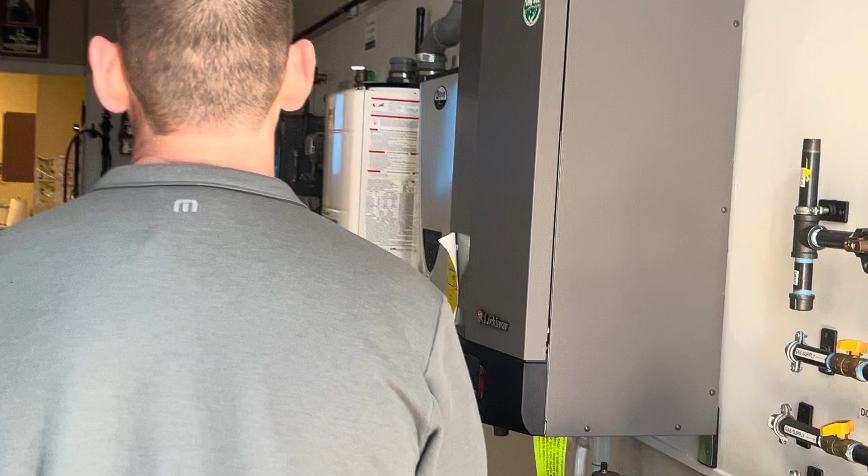We're at the Master Plumbers Council. They're a good little company, mostly dealing with master plumbers in the city of New York. I think you actually have to be a master plumber to be a member. They do a ton of different classes and host our classes too. As you can see, they've got water heaters, different gas lines, gas regulators. They do a lot of gas stuff, and also plumbing training and stuff like that.

Today we're going to go over our new PowerPoints. They're not actually part of the curriculum yet, but we're putting them together now. We'll probably submit them in 2025. It's currently December 2024.

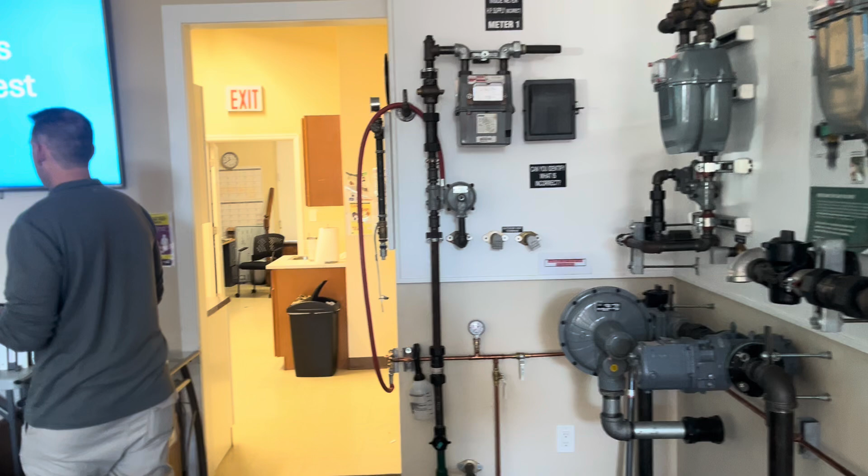He's got a lot of different training on how to start a backflow business, stuff like that. But anyway, they've got a pretty nice classroom, and we're just going to go over these PowerPoints.

A lot of people were saying, oh, you've got a lot of good stuff, but it's all practical - like, are you taking a test? But we want to get some informational stuff as well. There should be a link in the description with the website, and also some timestamps if you wanted to start a little later in or review different things.

The first one we're going to go over is check valves and how to test them - what a check valve is, how they work, and the different ways to test them.

Check valves were patented in 1907 in their first version. There's a lot of different types. Over the years, they've come up with different systems that work - you have swing, wafer, lift, ball, inline, and others. The general premise of a check valve is that they only allow flow in one direction. So essentially, water will flow through the check valve, but it won't flow back in the other direction.

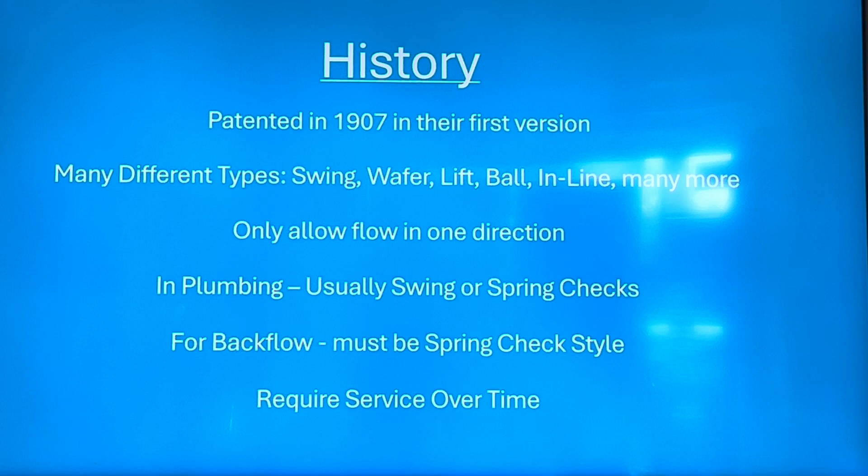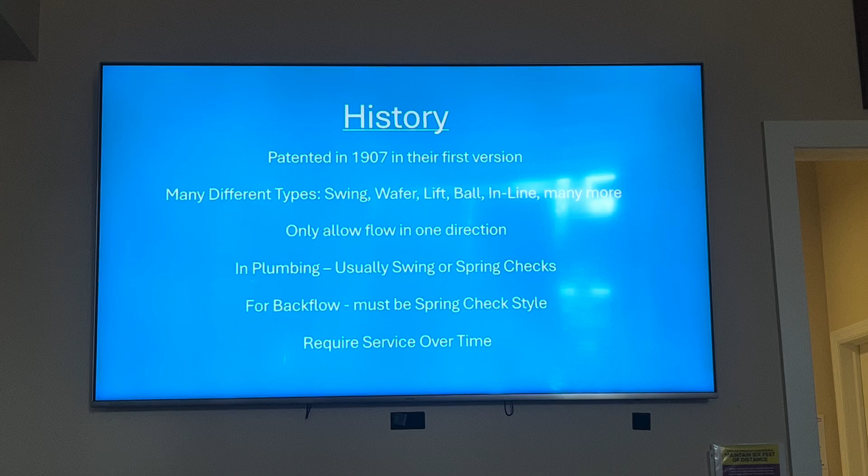Generally in plumbing, they're usually either swing or spring checks in piping. Ball checks are more for plumbing fixtures and a lot of different applications. For backflow prevention specifically, they're pretty much always the spring inline style. They don't last forever and require service over time - different components fall apart, springs break, discs get out of alignment, they get corroded, or you have calcification that causes problems. So the general premise is they're good, they should only allow flow in one direction, but they may malfunction, so they typically have to either be serviced or tested over time.

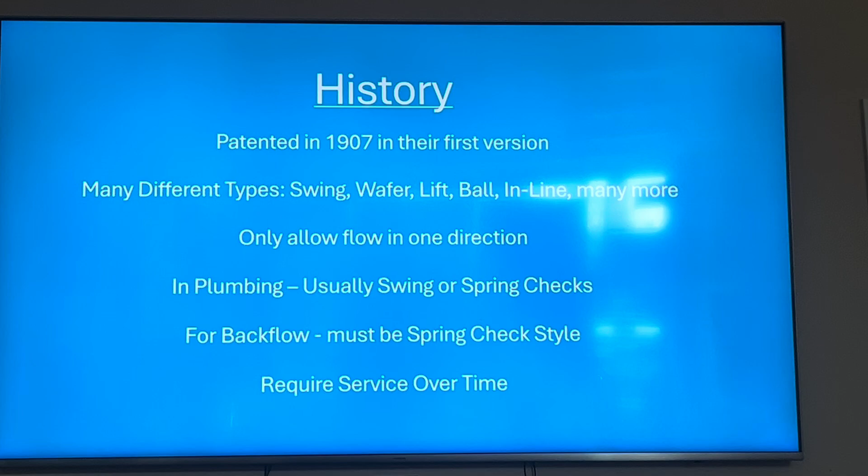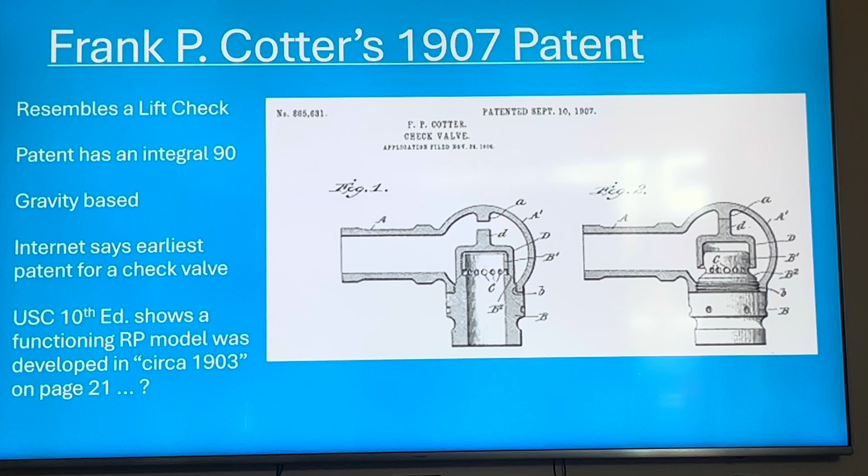The first one from 1907 - the guy, Frank P. Cotter, is forever immortalized in backflow texts and things like that. It just kind of looks like a lift check. It has an integral 90 in the patent, and it's gravity based, so there's no spring - the water pushes the check up and then gravity brings it back down. The USC 10th edition shows there was an RP circa 1903, but I don't think that's correct. I don't know who wrote the USC book - we might have to send in something to them.

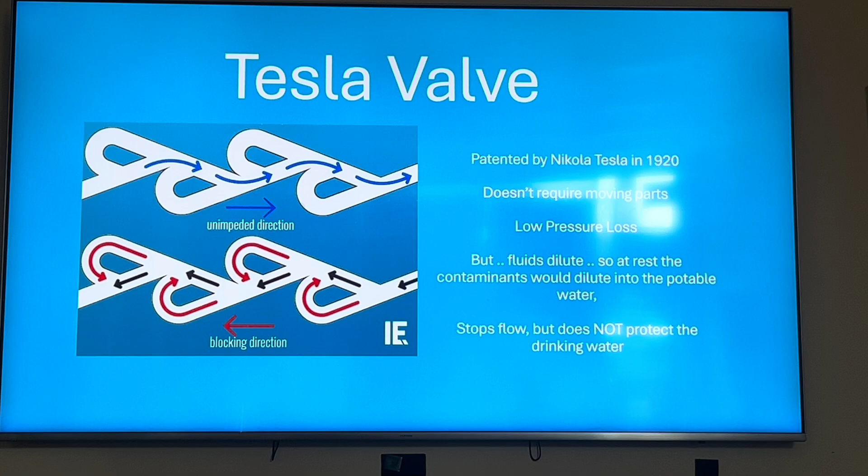There was also a valve called the Tesla valve. It's not really like a check valve in its modern form, but the idea is you just put a bunch of piping in there, and the water goes in the wrong direction, which stops the water from flowing. It's not super practical though, because if there's no flow - say one side had glycol - it would actually just dilute through the check valve, or if you have very low flow. So it's not super practical. I don't think anyone really did anything with it. I think Tesla went on later and invented a bunch of electricity stuff, but it was pretty cool. It's also a possible way you could stop flow in a piping system without a check valve, but because the fluid dilutes, you can't really use it, since the glycol would just fly back through the check valve.

Modern types include the swing, lift, and ball check. Ball checks are mostly in plumbing fixtures. The swing and lift checks are pretty common in plumbing systems. The lift is specifically more common in hydronic systems or process piping. The inline check, usually spring loaded or with some type of spring involved, is generally what you're going to see in backflow preventers.

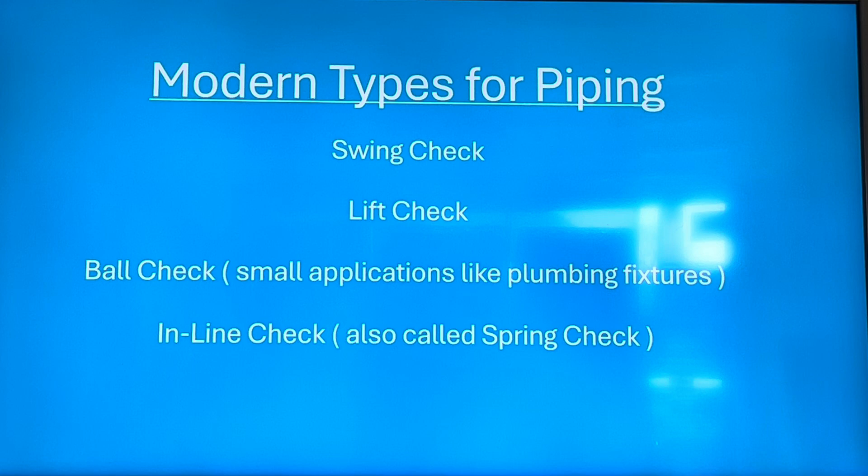You have lift checks. Again, they're more common in processing piping. Flow lifts the check, and then backwards flow doesn't, like the check drops. Generally requires gravity, so you have to have it in the right orientation. With flow, the pressure drop is a lot higher than for a spring check, because you kind of need like a 90 up and 90 back down. So you end up with a little more pressure drop.

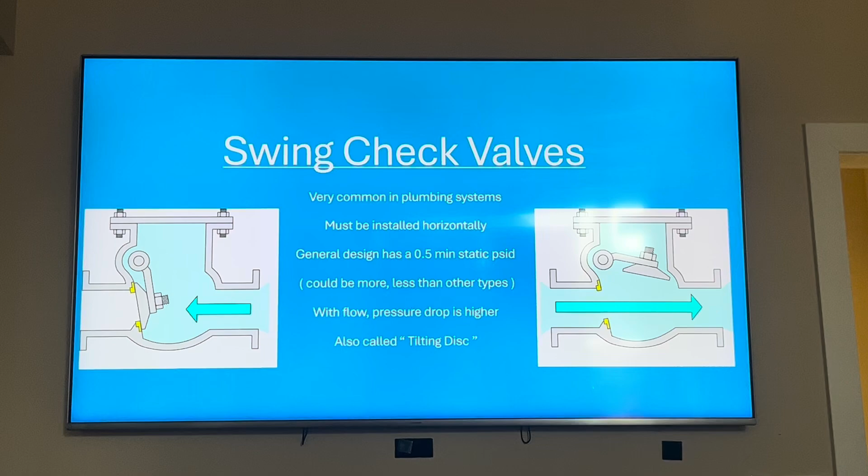Swing checks are really common in plumbing systems. They're not super common in backflows, because you have to put a spring in there somewhere or some kind of internal loading for it to be valid. So you don't really see a whole lot of swing checks.

You also see them in drainage piping, like backwater valves and things like that. They're also called tilting disc - I think the USC book calls them tilting disc style check valves. But most people would call them a swing check.

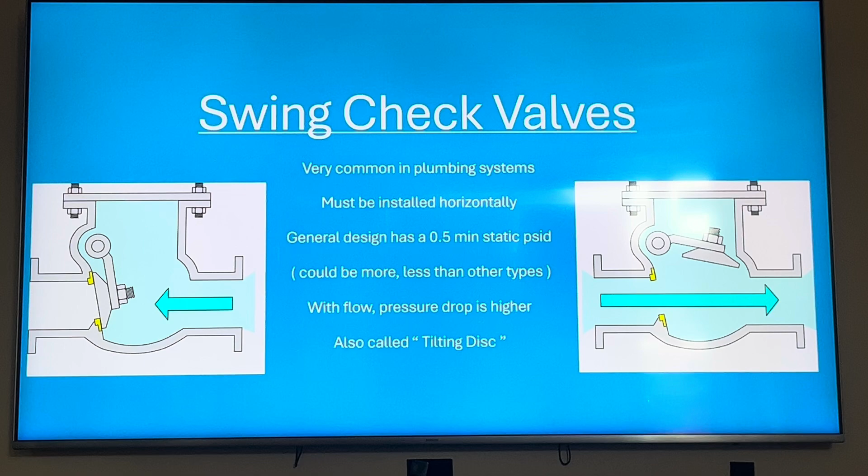Or a swing check. Swing check valves, say you got 60 PSI and then a half PSI drop. Somebody opens up a faucet, it introduces flow, the swing check opens. If you stop flow or you have back pressure, you end up where it closes.

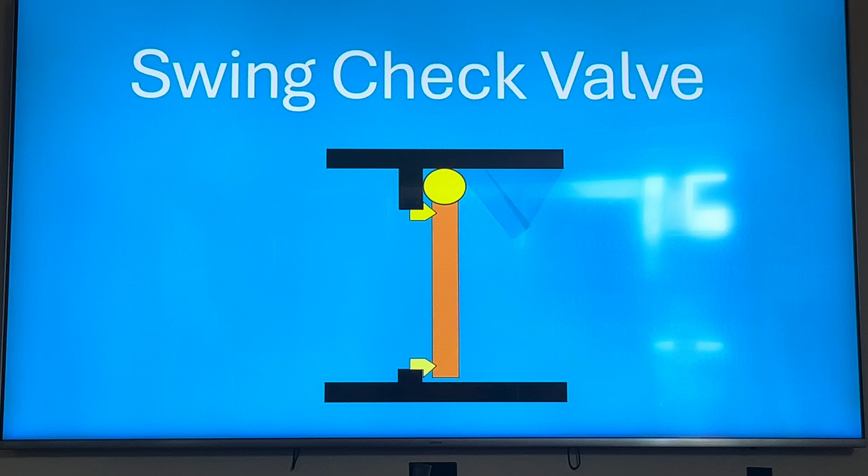Again, some manufacturers - I know Ames uses them a little more than other people - use a swing check, but it includes what they call a hinged spring to create the differential pressure required.

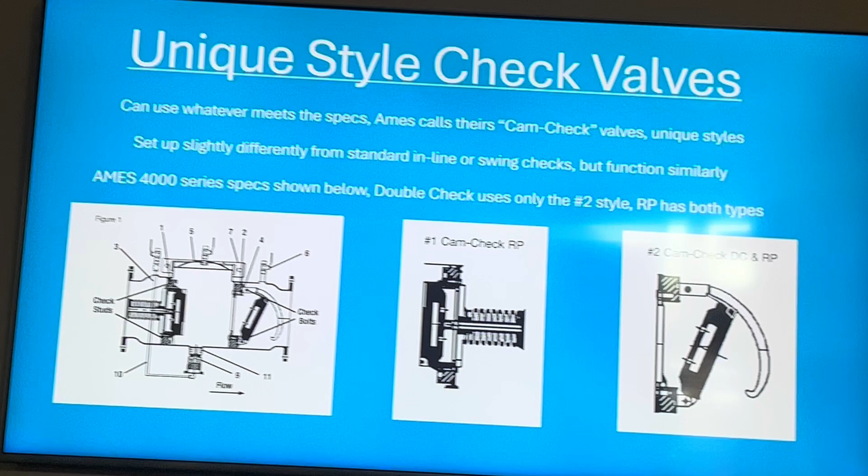There's also a couple of really different ones. These are from the Ames 4000 series. They have what they call a cam check, where essentially you have this thing here - they call it a cam. Then the check valve opens, and if it closes, it pushes it back up. And then this is just a standard spring check.

Also, if you ever mess with the Deringer series - I'm a big fan of Deringers. You see them a lot in LA, but I don't really see them everywhere else. You do see them more there because they're all sticking out of the ground. Essentially it's got an oblique disc, and these are really good for differential pressure drop during like a fire or something like that.

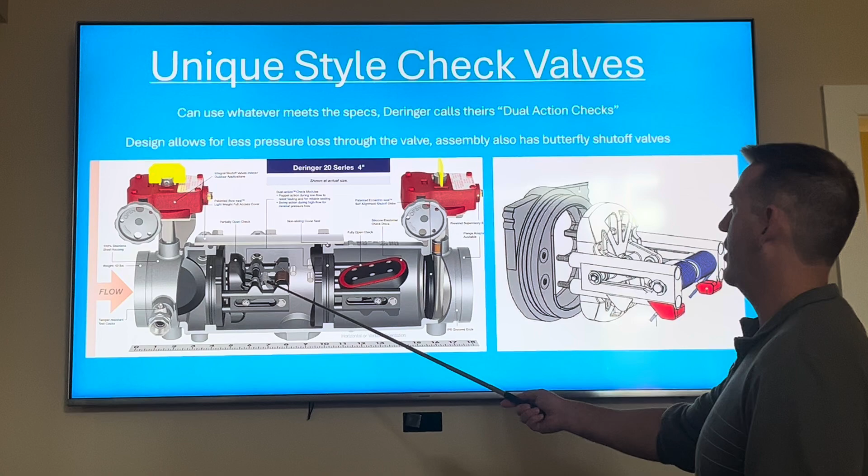Essentially, the check will actually get out of the way. So if you have extreme flow going through, the check will just kind of get out of the way of the flow, and it allows the water to flow more easily and with less pressure drop.

Also, they have the integral butterfly valves that are indicating. They're very good for fire systems as far as cost effectiveness and servicing them. So I'm a big fan of the Deringer ones, but they're kind of a unique style of check valve.

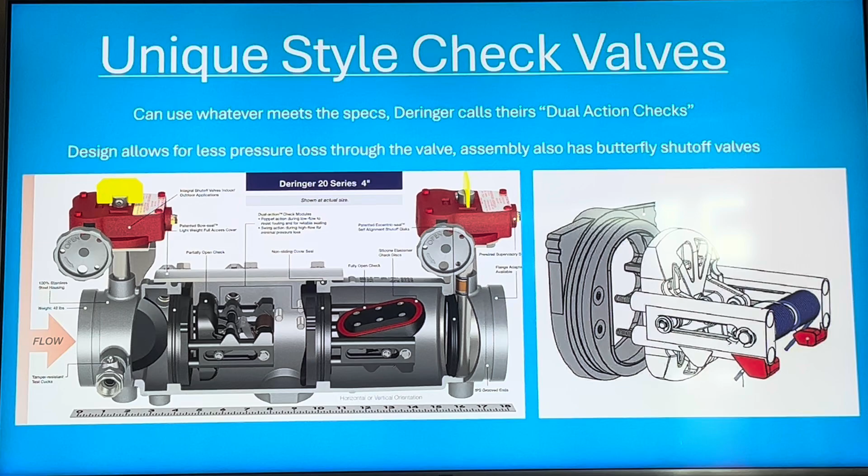So that's the general premise in backflow preventers - I believe it's worded that they have to be internally loaded. So they have to have a loading, and it all has to be internal, but it doesn't necessarily have to be like a standard spring and disc, which is more what you'd see in just standard backflow preventers.

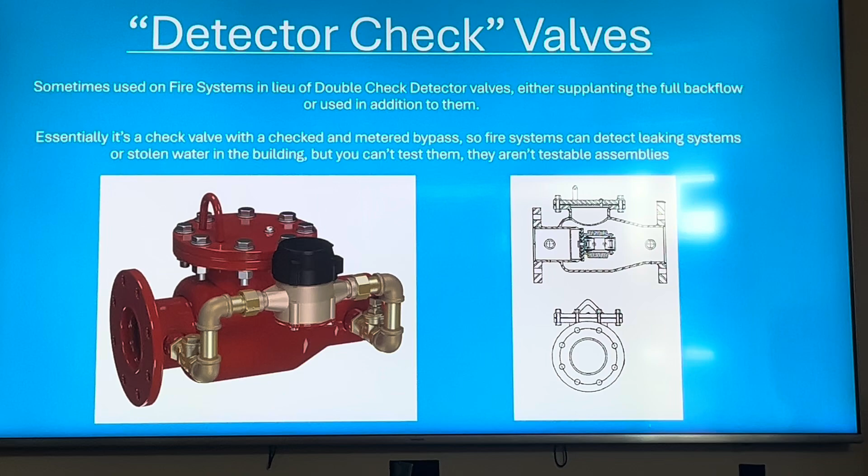But essentially it's just a check, and then it has a little meter on it, and another check. So you have a small check here, and a big check here, and then a meter. So instead of having a double check detector check, they'll put just a detector check, they call it. And then I guess you should be testing them, but I don't see any test ports, so I don't know if they're testing them as often because they can't test them.

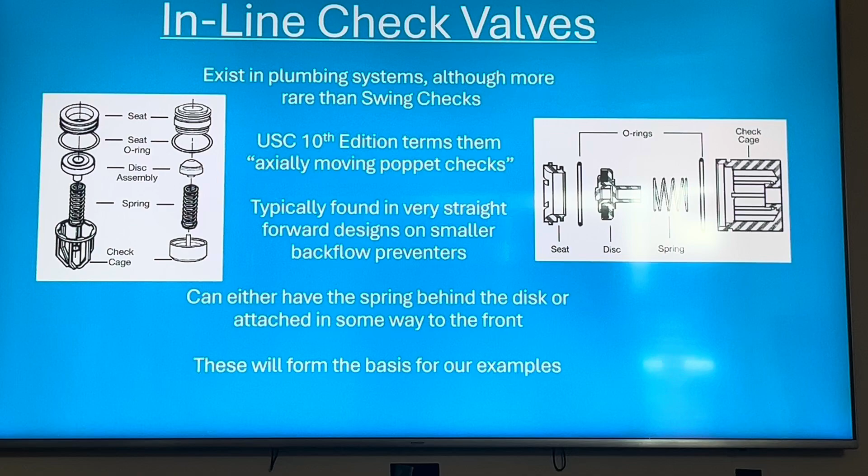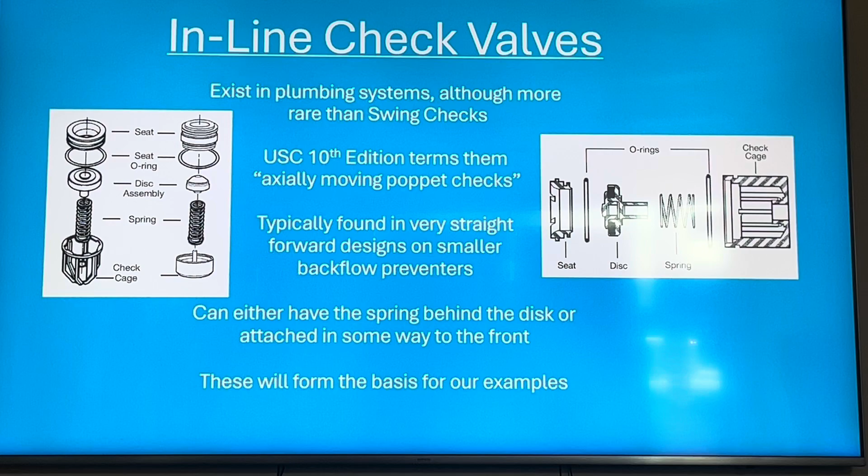Inline checks - you see them a lot in plumbing systems anyway, but you see them a lot more in backflows. Smaller diameter ones are pretty much always going to have these inline check valves. You can either have a spring behind the disc or attached to the front of it. These will form the basis of the examples - we have a lot of diagrams and stuff, and they're basically going to be based on this. So you have a spring check, you have a spring - there's a few different components.

You have a spring, disc, seat, and then just the housing.

So say you have 60 and 59, you have a 1 PSI pressure drop. Somebody opens a faucet, the flow goes through it. Now all of a sudden the pressure drops a little higher, you notice now it's like 4. If you have flow through a check valve, the differential pressure across the check valve will increase. Then if you have back pressure, it just pushes the disc a little harder into the seat and it should seal. So whatever's on the more than 60 side won't get into the 60 side.

This is kind of where they have springs, but they're attached to another way. A lot of times it's just the disc has a spring pushing it directly. This has more of a secondary housing and an extra spring. But the same idea applies.

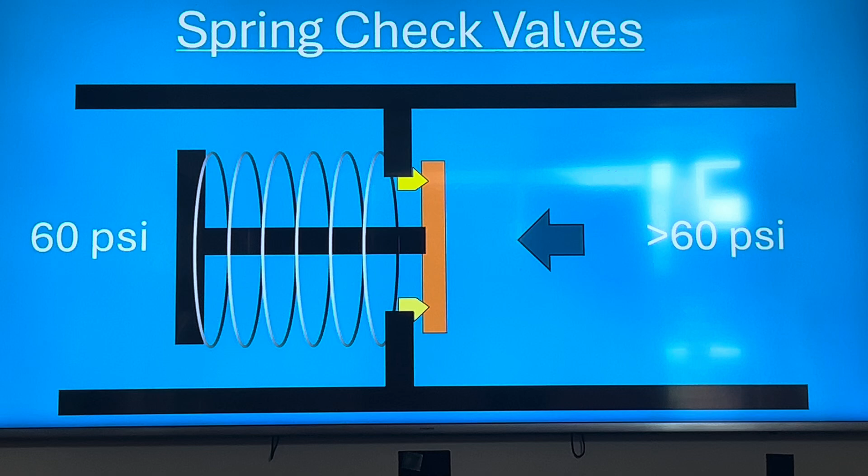Water flow is introduced into the system. The check valve opens. If you have back pressure, the check valve closes. Or back siphonage - either the supply pressure goes down or the downstream pressure goes up.

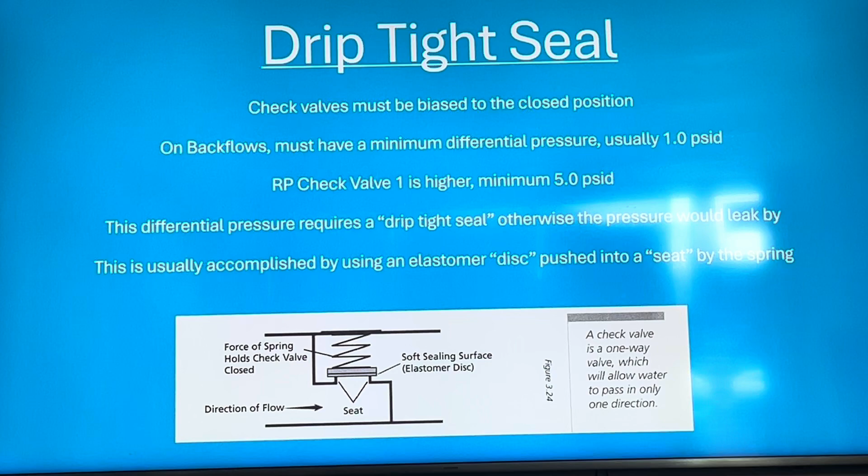Checks are designed to have what they call a drip tight seal. So essentially, if it closes, it shouldn't be leaking through. On backflows, they usually have a minimum differential pressure. You might only test the check under back pressure conditions, but either way, they should be loaded to have a 1 PSI minimum. The RP check valve 1 is actually higher - it's a minimum 5. The only reason it's higher is to facilitate the operation of the relief valve.

The differential pressure is a drip tight seal, otherwise pressure will leak by. So you can't have it where it just closes. It has to close in a way that no pressure or any fluids or anything get through in the backward direction.

So static condition, if you have a disc or a seat malfunction or the spring breaks or whatever, basically it just leaks by. So it might be closed, it's going to stop almost all the water, but then essentially they're both equal on both sides. So if you had a back siphonage or a back pressure condition, it would definitely leak by. It's not always necessarily having backflow leaking through it if it's leaking.

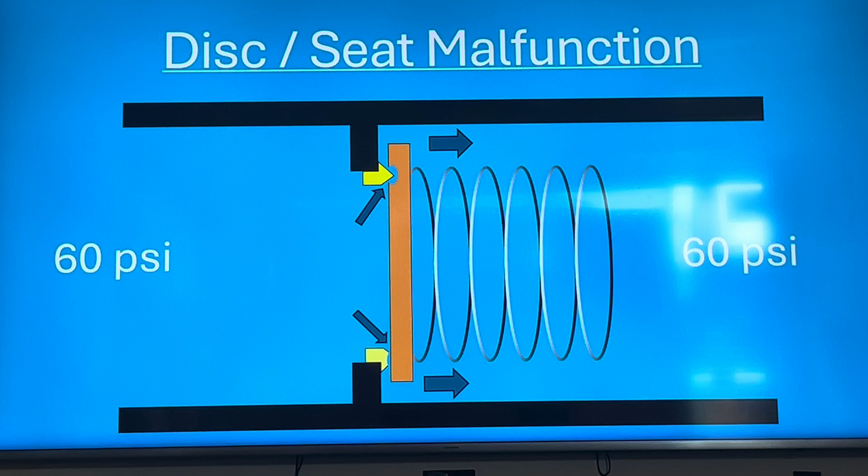But if the disc or seat does not have a drip tight seal, in either of the examples where the disc at the top is broken or the seat at the bottom is broken, it'd be a malfunctioning check valve and it would need to be repaired. You notice it when you're testing it, it fails the test, and then you fix it, and then it should be functioning properly. Or if you have debris.

Also, a lot of times, we teach this in the backflow classes, it's not that the check valve itself is broken, it's not that you need to replace a piece of it, it's just the disc is stuck open due to debris. So a lot of times it'll fail the test, you open it up, you don't need to actually replace anything, you just kind of clean it out and put it back.

You would think, oh, so why don't I just check it to make sure I need to replace it before I get a repair kit? And the trouble with that is a lot of times when you open it up, everything breaks. So you take the top off and then the O-rings or the gaskets kind of rip in half and all that. So we recommend if you're going to do that, even if it is a debris collection issue and all you do is wash it out, that you have the extra parts around even if you don't use them.

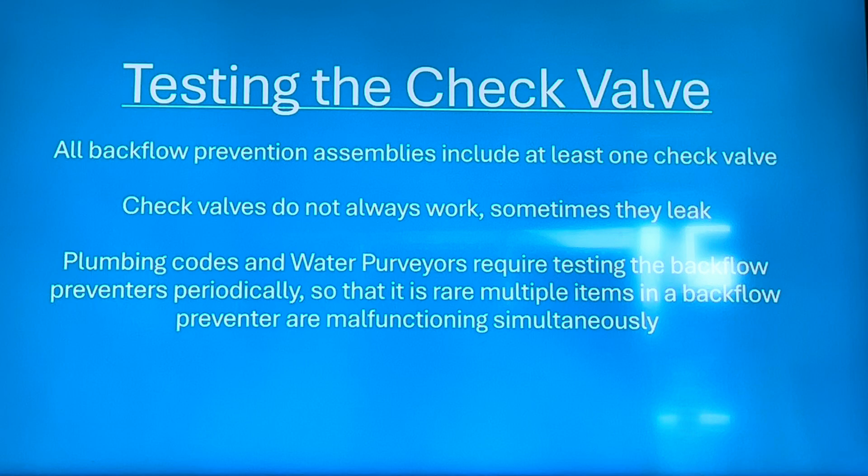Again, all backflow prevention assemblies all have at least one check valve. RP and double check have 2, but the other ones have 1. Check valves don't always work, sometimes they leak. So you have to test them periodically.

There's 5 main ways to do a check valve test. I compiled most of this information from just doing the classes in different areas. Some of the standards, like the ASSE standard, doesn't refer to a couple of them. But they're all kind of in use in some part of the country, so they should be valid for whatever testing procedure you're doing on the check valve.

And a leaky check valve, if you did any of these 5 tests, should fail. So it's not like if you do a reverse flow back pressure test, the check valve would fail in that test or in a static differential test - either one would do it. They all have generally strengths and weaknesses, which we're going to go over in this PowerPoint.

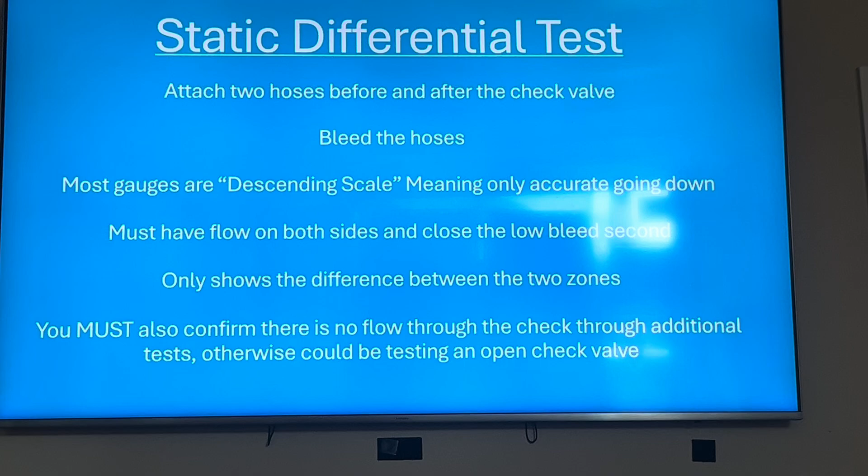Static differential test: you attach 2 hoses, one before the check valve, one after it. You bleed them. Most of the gauges are descending scale, so you usually have some kind of system where you reset the gauge, or you open the low and close the low, or you just close the low second to get it on the descending scale. You got to have flow on both sides.

And all it shows is the difference between the 2 zones. It doesn't necessarily say the check valve is not broken, it just gives you the difference in pressures in the 2 zones. So there's a big weakness on it where you have to do a no-flow test.

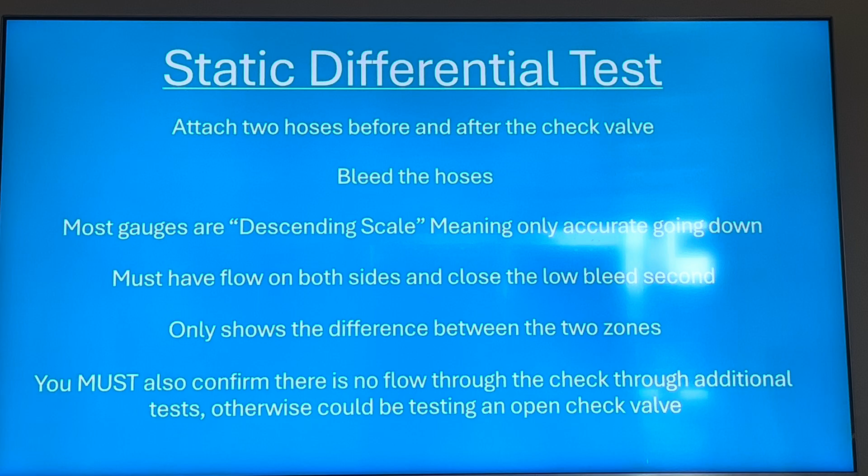So you have to confirm that it's in a no-flow condition. The USC procedures loop the bypass around to test cock 4, but there's a lot of different ways. You could just do a no-flow test, and if it passes, then do the check valve tests. Otherwise you could be testing an open check valve. Even if the check valve is leaking, the disc or seat malfunction is present. If you have flow through it, a lot of times you'll still get a passing reading. So that's the big weakness.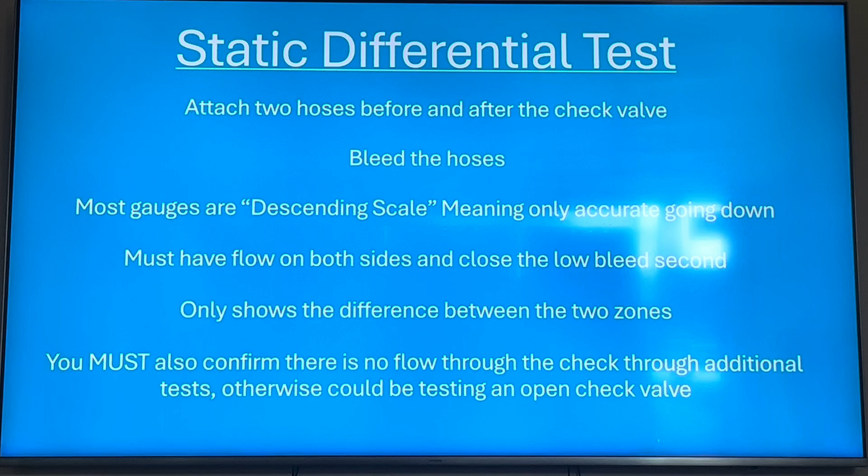So here we have this, our Kruger Instruments test kit. Check out the description if you're looking for a test kit, we have a lot of different things going on with that. But this is just a standard 2-valve test. Some people might be using more valves, like a 3 or a 5-valve kit. All of our stuff is generally based off the 2-valve kits.

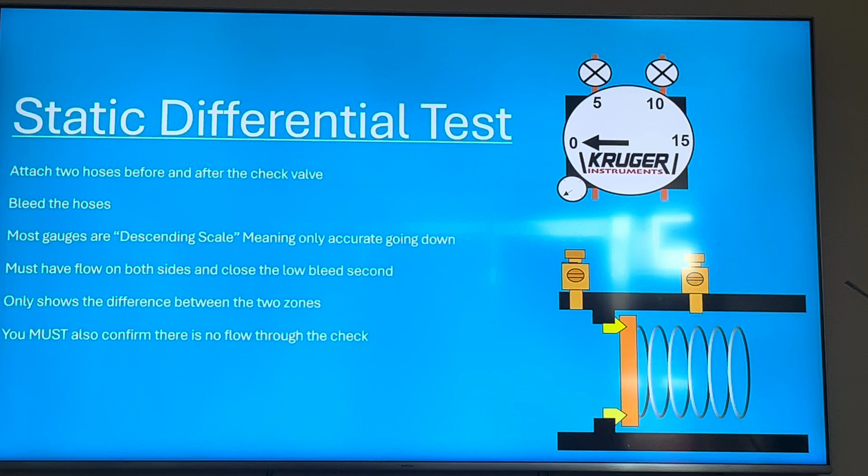So you just attach 2 hoses, high and low. Bleed everything out. Close high. When you close high, the pressure goes up even further on your test kit. Then you close low and it'll drop down to wherever the drip tight seal is.

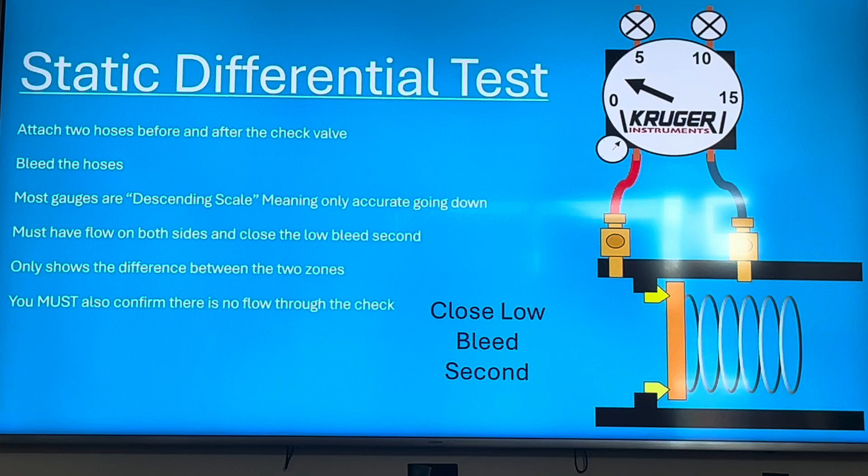Again, the big weakness here is that you have to confirm there's no flow through the check. That means you have other different tests. I've had a couple, I know we got one instructor, actually the instructor teaching this class, Tim, you might meet him, but he seems to be confused about that sometimes. A lot of people just do high to 2, low to 3, get your reading, then move over high to 3, low to 4, get your reading for check valve 2. But you do have to confirm there's no flow.

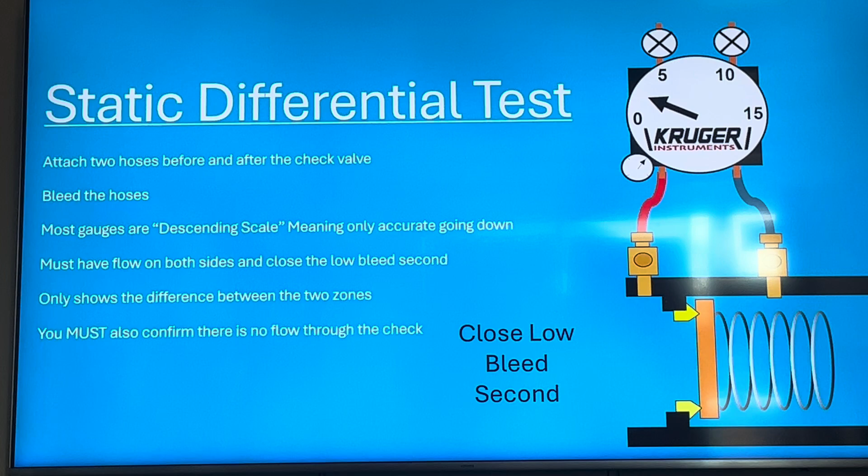They added that in the 2000s, so some of the older school guys who took the original class back in the 90s just think it's a waste of time, like 'I'm not gonna bother doing extra steps I don't have to.' But the current standards do require a no-flow check.

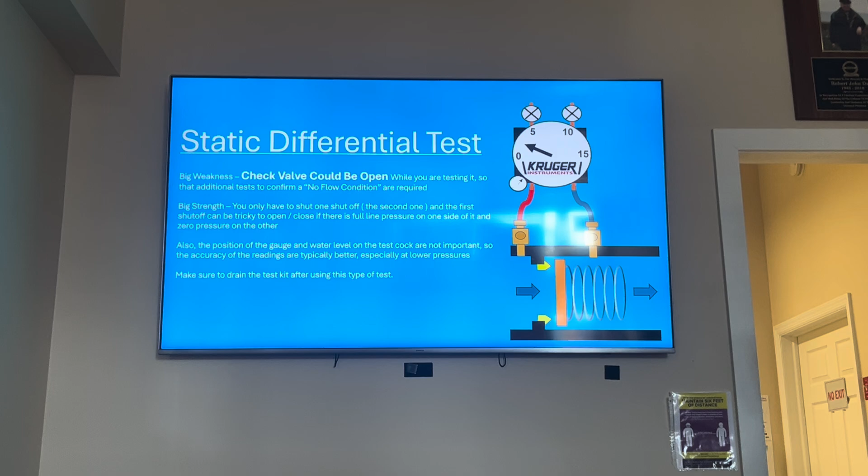So yeah, again, the big weakness is the check valve could be open, so there's always some no-flow condition test needed. The big strength though, which is bigger, we used to do almost all one-hose stuff, but you only have to shut one of the shutoffs, and you only shut the second shutoff if you're doing a static differential test, because you have line pressure coming through the number 1 shutoff and you don't even close it.

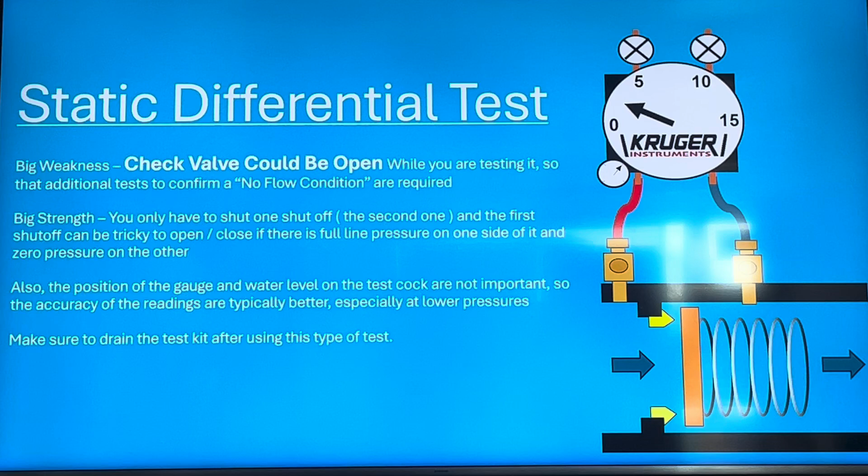And if you shut the first shutoff, like say you're doing one of the other types of tests, a lot of times when you reopen it, say you have full line pressure behind a shutoff and nothing, like 0, after, when you open it again you actually kind of mess up the valves.

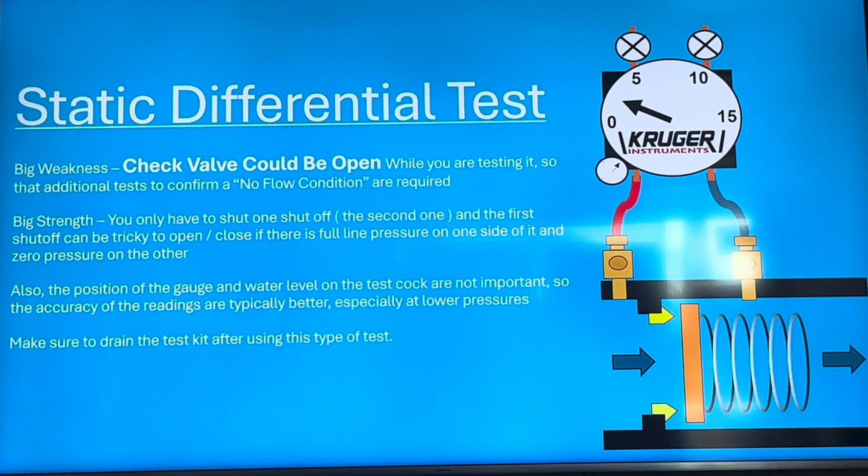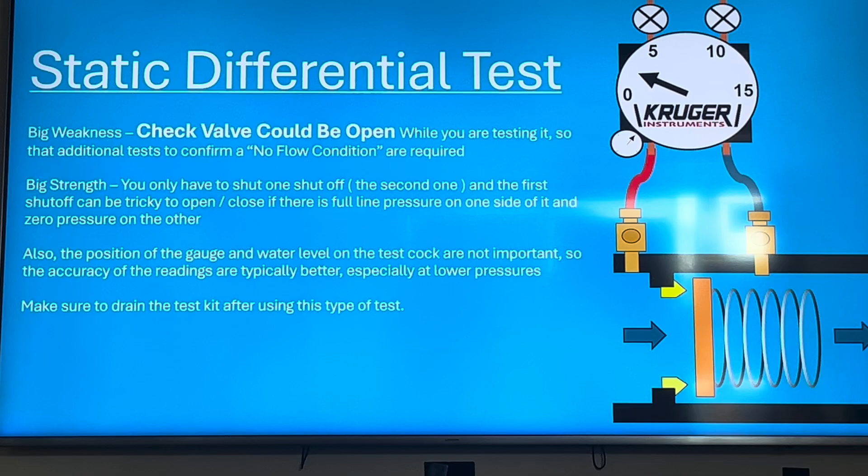We were actually making fun earlier during the class because essentially for the USC test procedures, you have to do the 1-hose method on double checks, and a lot of times the double checks are bigger, they usually have gate valves. USC has all these extra procedures in case the shutoffs are leaking, and we're kind of like, well, no wonder the shutoffs are leaking, you're 1-hosing all the double checks. If you're 1-hosing these 8-inch gate valves, some of them are probably going to start leaking, because every time you open it, it kind of messes up the valve, or it can.

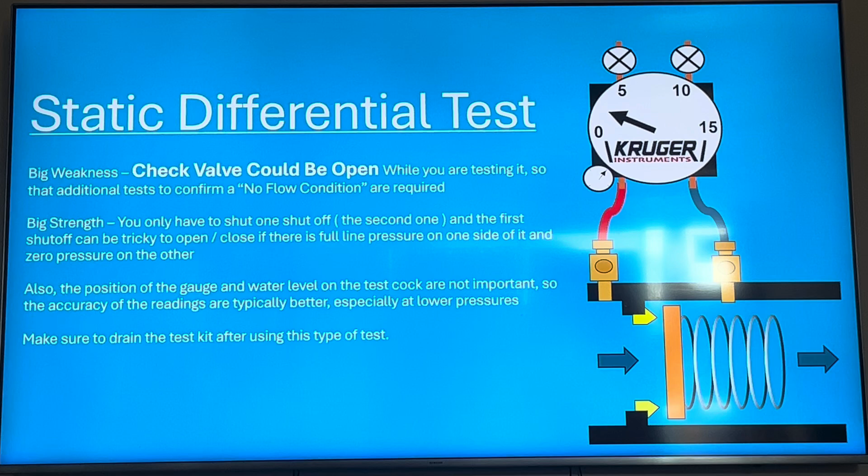Also, one of the other strengths is the gauge and the water level on the test cock are not important. With the 1-hose tests, you have to make sure your gauge is exactly level with whatever you're testing, or whatever the high end of the water is on the low side. Whereas with this one, you could have it at any level, and that can help you depending on where the check valve is located.

Like if it's underground, you might not be able to get down there. If you're doing a double check that's in a vault, you might not be able to get your gauge down there as easily.

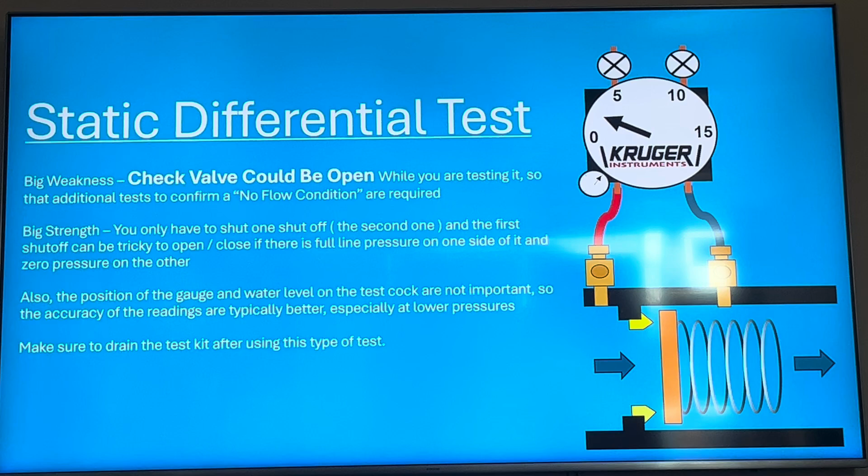If you're ever doing these tests, make sure you drain your test kit. A lot of people don't, and what happens is you might have calcification in the kit. There's a lot of different problems that can come from not draining it properly. Also, they freeze more readily. So if you're going to fill both sides of a test kit up with water, you just want to make sure you drain them.

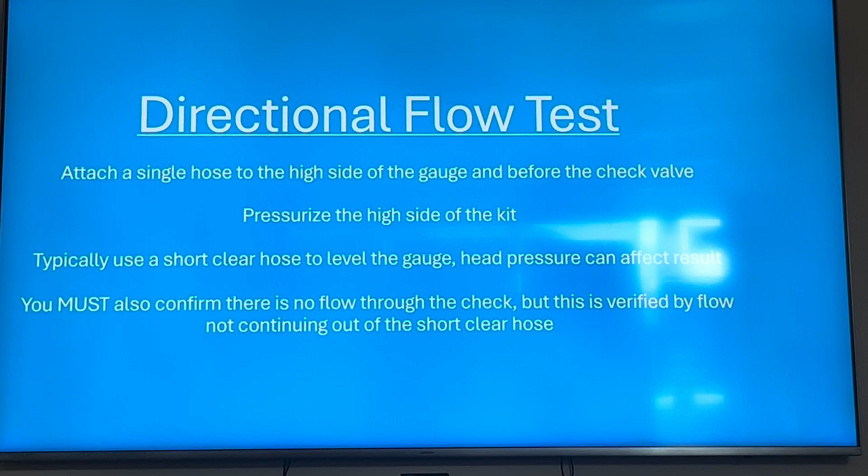The next one we're going to talk about is the directional flow test. Some of our materials over the years call it the direction of flow test. The only thing I can come up with on how they came up with direction of flow is I think the Florida people, like University of Florida who made the textbook, just misheard it when they were talking, because direction of flow doesn't really make any sense. But if you look at the ASSE standards and a lot of that stuff, it's directional flow.

Essentially you just have a single hose to the high side of the gauge before the check valve, and you pressurize it. If you're doing a directional flow test, you want to use a short clear hose. This can help you determine the level, and per the standards you're supposed to. Some people don't, they just make it level with the test cock. I would say you always want to have a short clear hose. You could either have one with a 90, one without the 90, one swiveled, however you want to do it.

You also have to confirm there's no flow through the check, but that's through the diagnostics. You verify there's no flow because water's not running out of the short clear hose. So if you open up test cock 3, you're testing check 1, and water keeps running, it's not necessarily that a shutoff is leaking, but that you're testing the check valve while it's open. You cannot test check valves while they're open. So if you do a one hose test and water keeps running out of the test cock, you have to bypass it somehow.

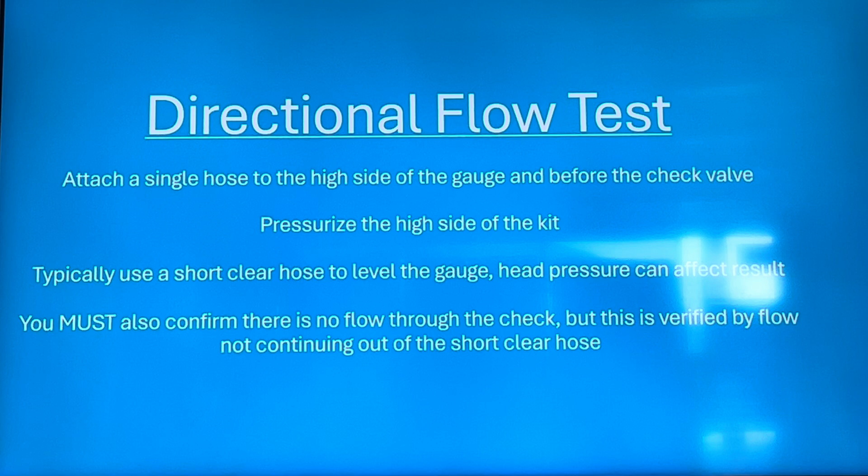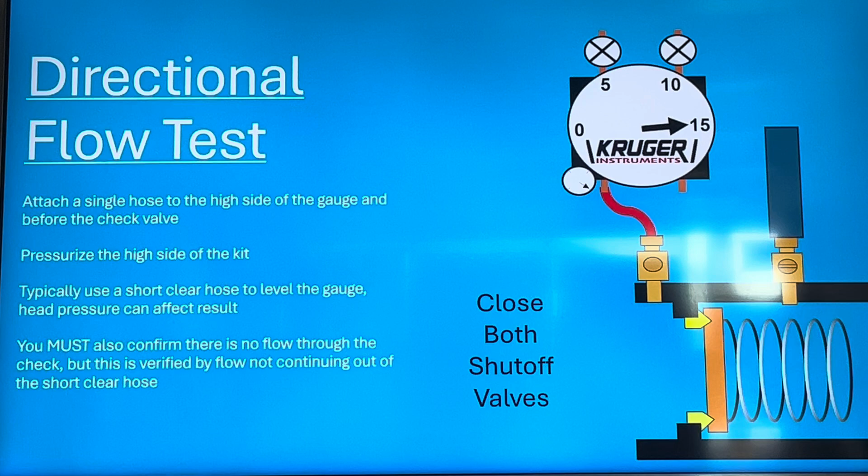So for the directional flow test: put one hose on the inlet side, you have your short clear hose on the other side. Open up your high bleed, open up the test cock, close your high bleed, and then you close both shutoff valves, obviously, otherwise water will go everywhere. Open the downstream test cock. Once the flow stops - if water keeps running out, you've got to do something, either use your high bleed or one of the bleed off valve arrangements.

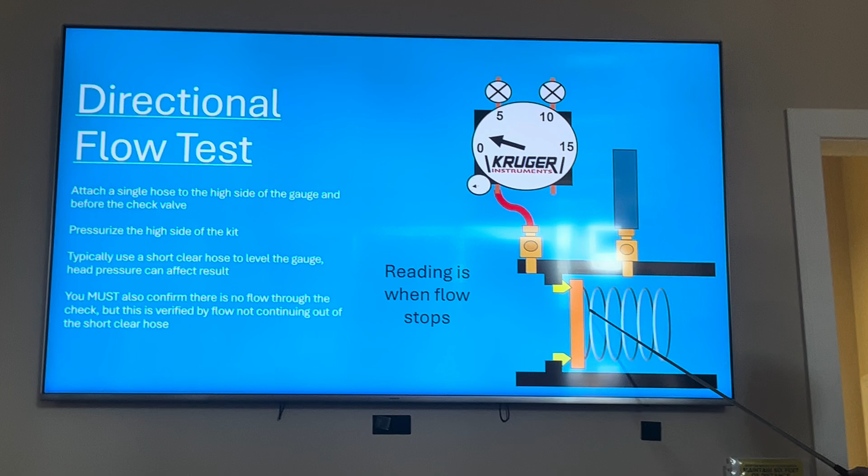Once everything stops, you have a reading on your gauge - that's the check valve. Essentially, if the check valve was broken, it would run through and come out, and then it'd go to zero. So if it's holding a number, that means this zone holds a number, this side has zero. The spring is pushing the disc into the seat, and if everything's functioning properly, that means the check valve is functioning properly.

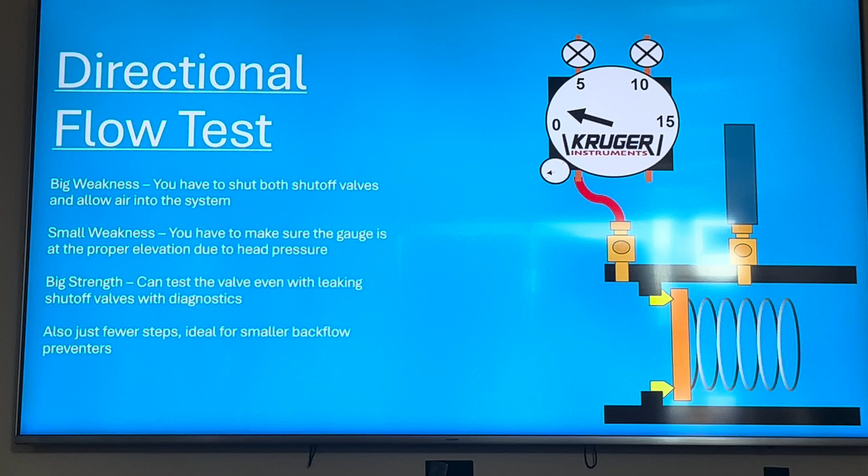Big weakness though: you have to shut both shutoff valves, and it also kind of allows air into the system sometimes. So if you're shutting both shutoff valves and it's a 10-inch backflow with a 10-inch gate valve that looks like it was built in the 90s, the shutoff valve probably leaks, so you probably have some extra steps you have to do. But also, when you reopen it, you can damage it. So you always want to do a couple extra steps to recharge it before you open it. There are different ways to get around that to make sure you don't damage the valves.

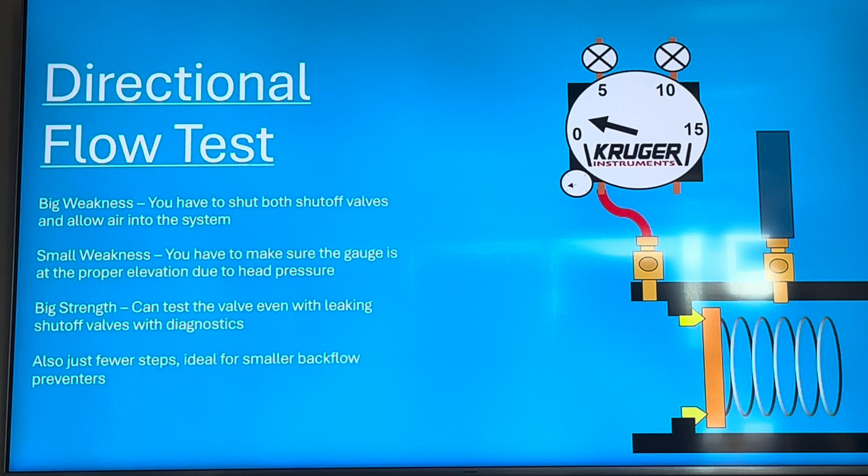Also, small weakness: you have to make sure the gauge is at the proper elevation. If you don't, the head pressure can affect your reading. So say your gauge is 2 feet higher than the top of your clear hose - 0.433 times 2 feet - you'd probably be reading about 0.86 PSI lower than you should.

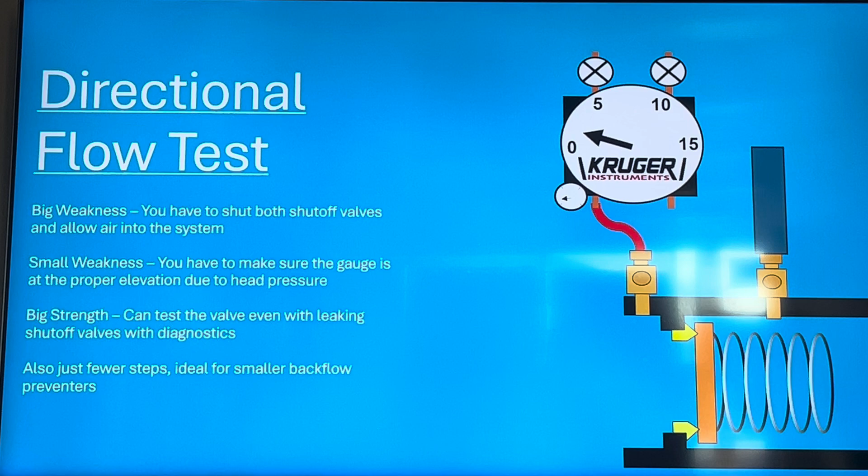A big strength of this test is you can test the valve even with leaking shutoff valves. If you're doing a differential pressure test and you have a leaky shutoff valve, and your no flow confirmation fails, you're kind of screwed. Whereas with this method, even if the shutoffs are leaking, you can still get a proper reading. It's also fewer steps, a little simpler of a test.

Next, we're going to go over the head flow test. This isn't necessarily a legit test in most areas, but if you're just testing a check valve it would definitely work. If you're testing a backflow preventer though, they usually want the number. It's very similar to a directional flow test, but instead of a gauge reading, you just have a tight or not tight test utilizing head pressure, so you also need a lot less equipment.

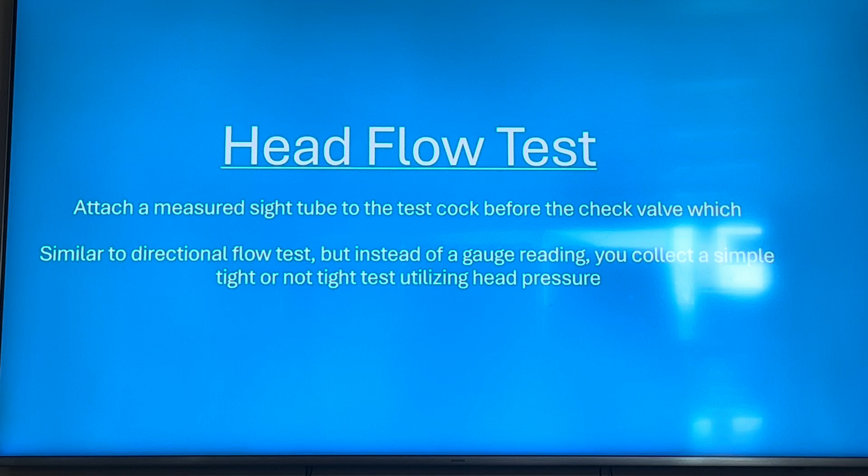In LA County specifically, like Los Angeles, they actually kind of want you to do that test, I guess because it's simpler for everyone.

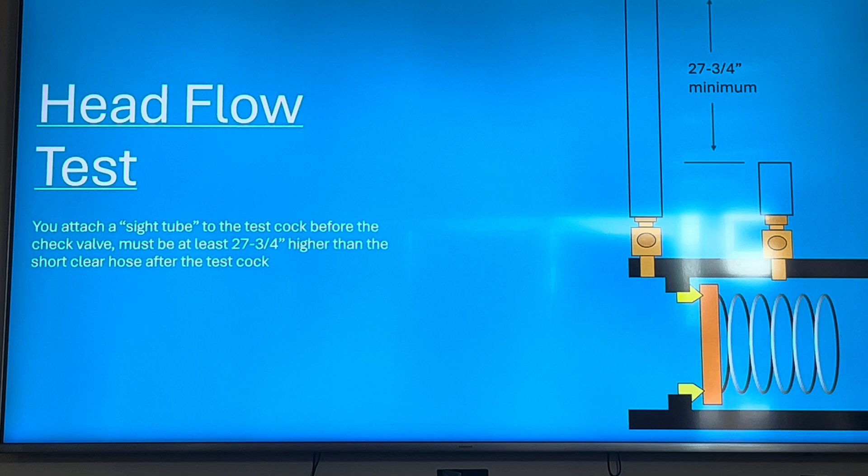The idea is you have a sight tube to the test cock before the check valve, and then a short clear hose after, and you measure from the top of the short clear hose up to the top of your sight tube, or some point - maybe up towards the top is 27 3/4. That's fine too, but it has to be at least 27 3/4 inches higher. If you know backflow and plumbing, you know that 27 3/4 inches of water column is exactly equal to 1 psi.

You just fill the sight tube with water, fill the short clear tube with water, and close your shutoffs. Again, you do have to close both shutoffs, so the same weakness applies where you might be messing up the shutoffs.

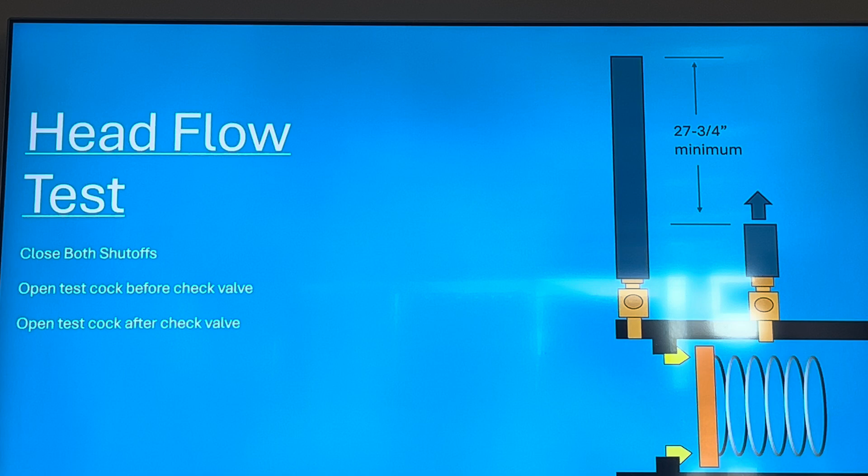Open the test cock before the check valve - that bleeds off all the pressure. So say it's running at 60, you open the test cock before the check valve, it'll set it to whatever head you have on that tube. Then you open the test cock after the check valve, all the water bleeds out. The idea is the head pressure from this water - if the check valve was leaking, it would go down and equalize. So if it's holding at 27 3/4, you know the check valve is holding at least 1.

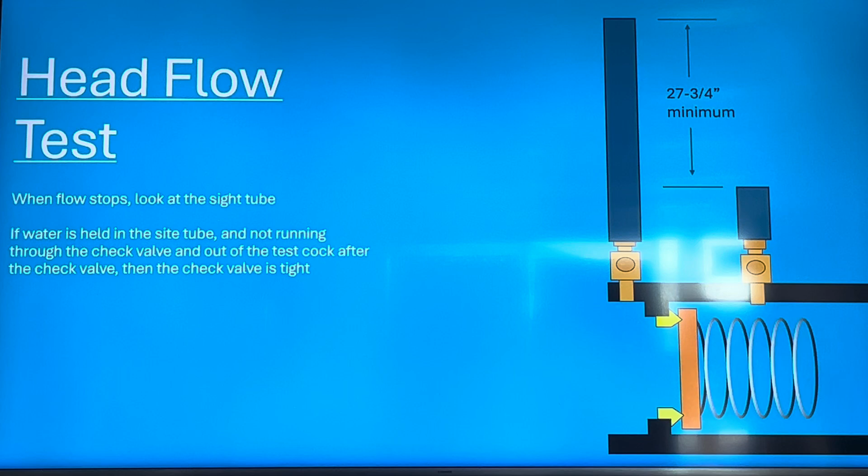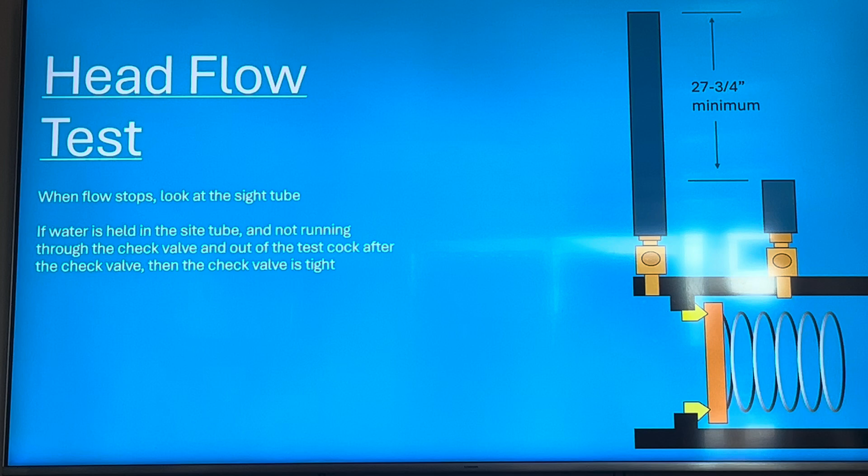The big weakness on the head flow test is that you don't get a number. You just say the check valve is tight, it held at least 1, but you don't know if it was 2, exactly 1, or 100 - you just know it held that 1, and that's good enough for some people. A lot of test reports you fill out will ask for your gauge model number, what test kit you used, when it was calibrated - and you'd just say, oh, I don't have a gauge, I used a head test, I guess.

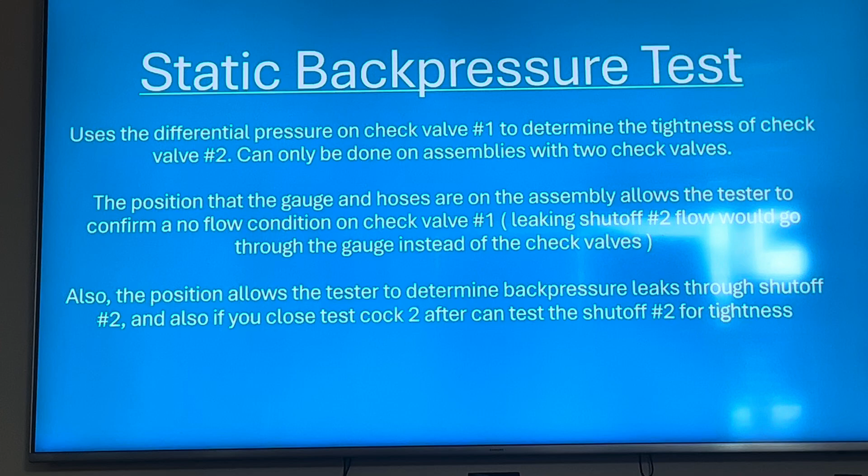It uses differential pressure on a previous check valve - generally check valve 1, since there are usually just 2 check valves - and you're doing it on check valve 2. You use the differential pressure on check 1 to determine the tightness of check 2. You position the gauge and hoses so you confirm it also - the static back pressure test is nice because if you need a no flow condition test, you kind of have it all set up to do that test right after you do the back pressure test.

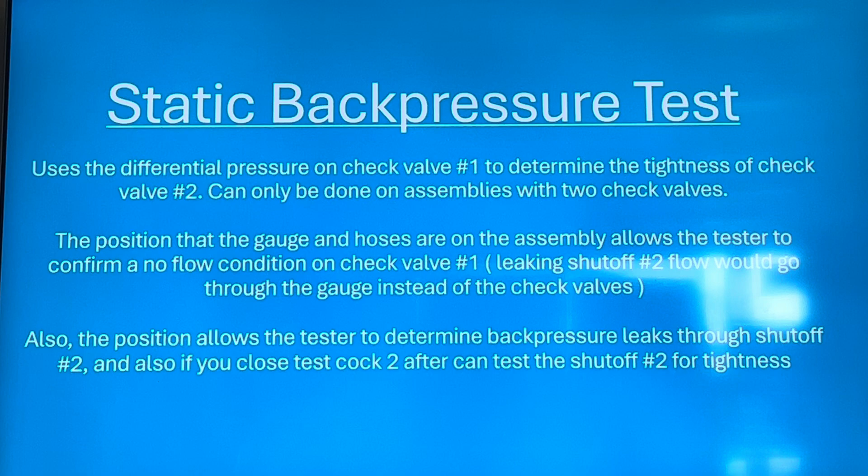The position also allows the tester to determine - similar to that - if you close test cock 2 after you do this test, you can test shutoff 2 for tightness, if that's one of the required tests for your jurisdiction.

So essentially, we have the 2 hose model here. You have high to 2, low to 3, and then you take the bypass hose and run it over to 4. Open test cock 4. Open and close the low bleed - opening the low bleed resets the gauge. Then you just open the high bleed. Once you're finished with the relief valve test on the RP, or if you're doing a double check, you just do this right after you do check valve 1's test.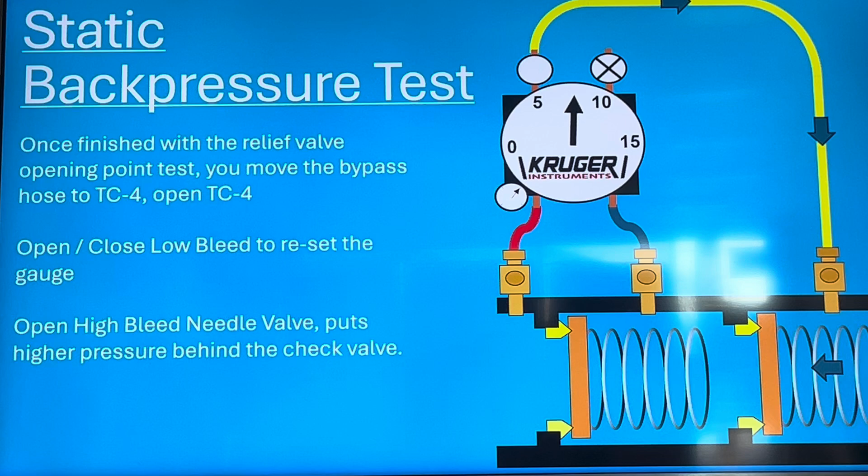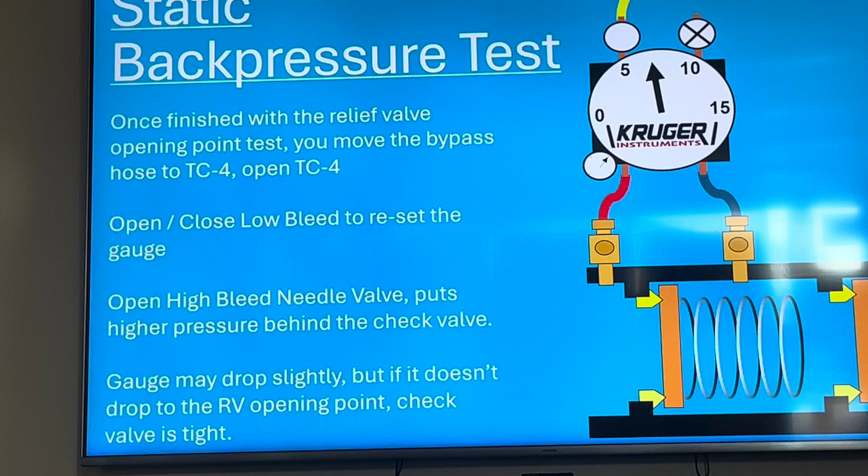So you open high, and you're going to get a little bit of decompression usually - it might drop from 8 to 7, or 8 to 7.8, something like that. So then you have to reset your gauge again to get check 1. When you open the high bleed, if check 2 leaks, it's going to leak through the check valve, and this zone will increase, and your number will go down.

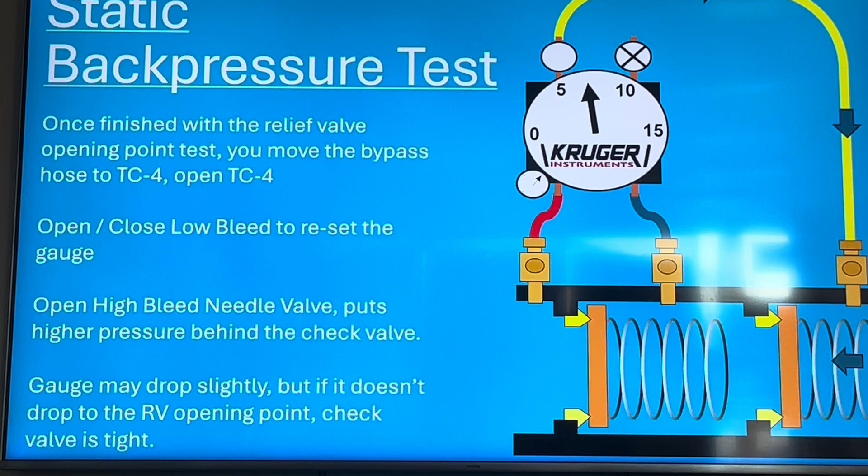You see this more prevalently on the USC test procedures for the RP, but there's also a double check procedure that does these tests on check 2. It's a fairly common test - you see it a bit more with the 3 valve kits, but again we have the 2 valve kit, which is actually a lot more efficient I think, with fewer steps. You save a lot of time using the 2 valves.

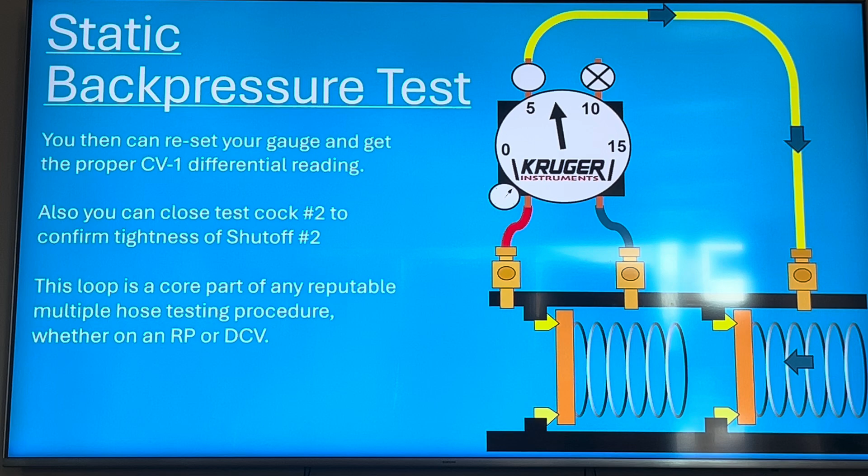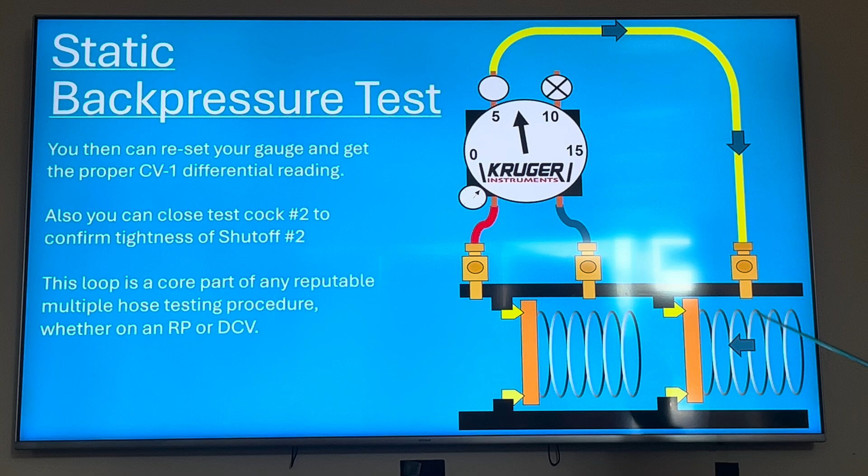You can then reset your gauge and get a proper check valve 1 reading. So again, if this is a differential pressure test on check 1, because you have this looped here, if you had a flow condition, it actually bypasses the flow through the test kit. So now you've confirmed check 1 is in a no flow condition without even testing shutoff 2. The check valve 1 is definitely in a no flow condition, because when you open that high side, if check 2's leaking, it goes through. But if the shutoff is leaking on the other side, the water runs through the gauge. So it helps a little bit with that.

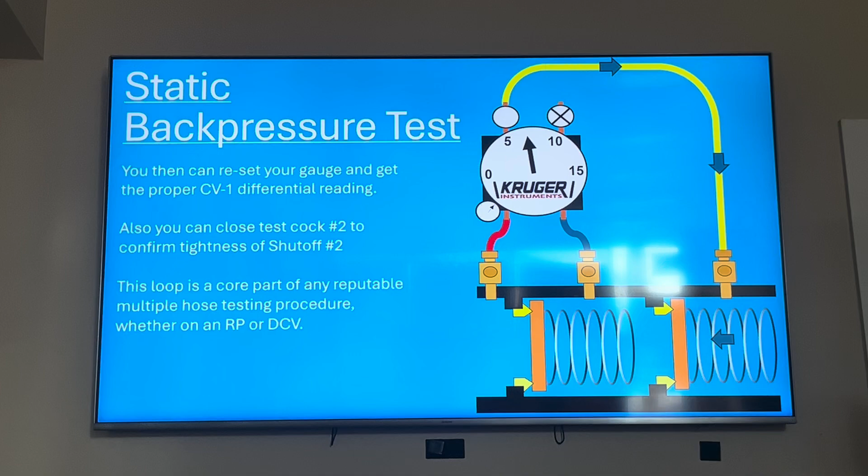If you're testing double checks and you're not doing anything like this, and you're just doing 2 hoses, you might want to pick up the textbooks and reread chapter 9 or whatever chapter you're looking at, because you're not supposed to do that, and it's definitely not as legit as doing it this way.

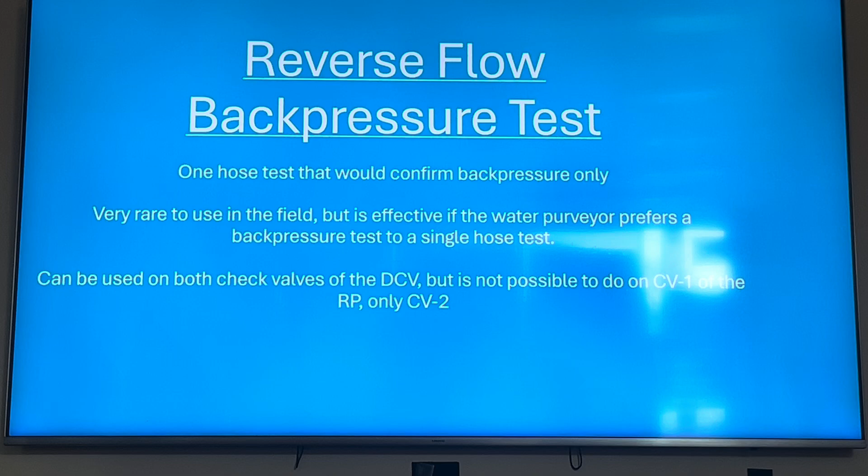Some people argue that the fire systems the double checks are on should never have any flow, so why would I bother confirming there's no flow? Good input question, but did you test the fire system recently? Maybe it's leaking. Or maybe somebody's stealing water on the 10th floor and nobody knew about it until today.

There's also a reverse flow back pressure test. I don't think that many people use it. It would be effective, I'm not sure if that many water purveyors want you to do it. I really just saw this, that there's some school in Long Island that teaches it this way. But other than that, I've never heard of it. But it should be a good test. I like how it works.

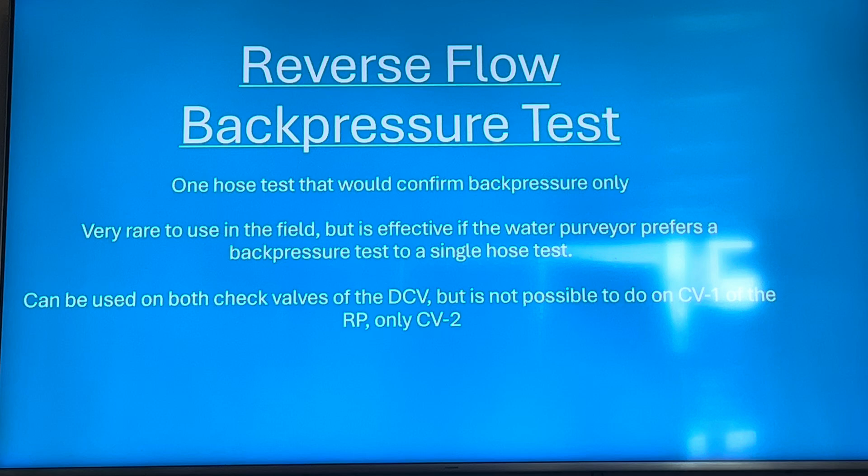One caveat though, you can't do it on check 1 of the RPs because it would just dump all the water out. But it could be worked on the double check. If you had like a PVB, I wouldn't do it. A lot of them I wouldn't do it. It's really just on the double check if you wanted to do it that way. But it's pretty cool, so we included it in the PowerPoint.

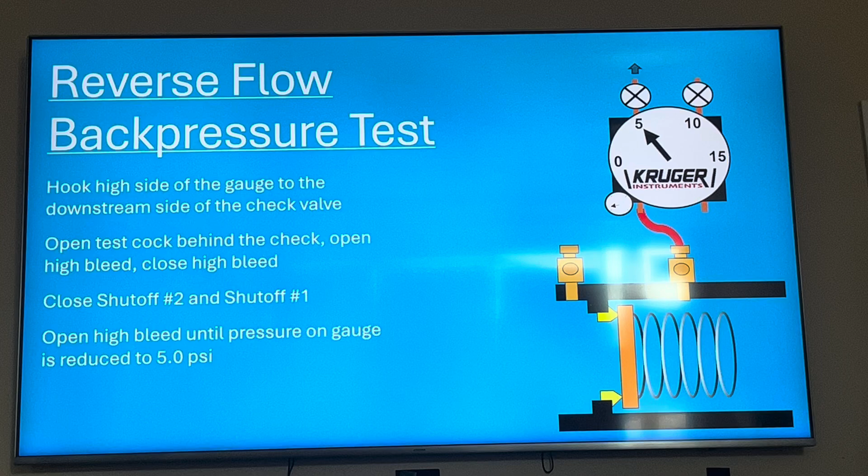Hook the high side to the downstream side of the check valve. Pressurize. Close both of your shutoffs. And then you just open your high bleed and bleed the pressure down to some number that's easily referenceable. Most people do 5, but if you want to do 10 or 3, whatever you want to do, generally people do 5.

And then you just open the test cock before the check valve. So the idea is if you had 5 here and the check valve leaks, when you open up this test cock, the 5 would bleed down and it would bleed backwards. So it's a pretty cool little test.

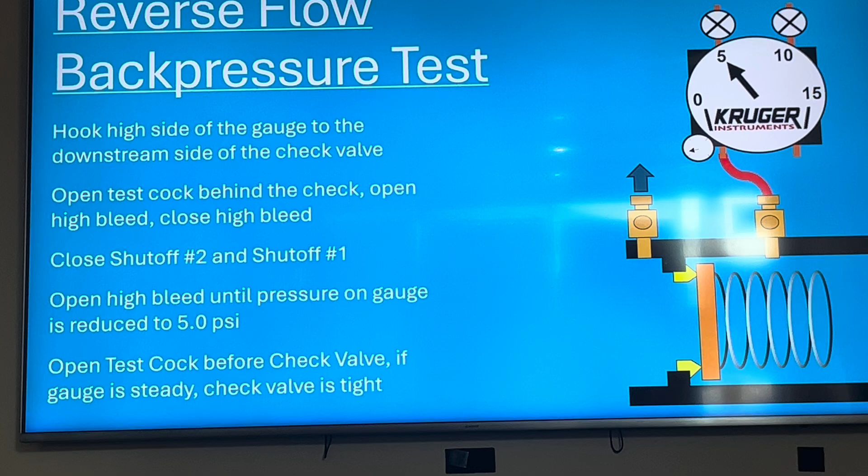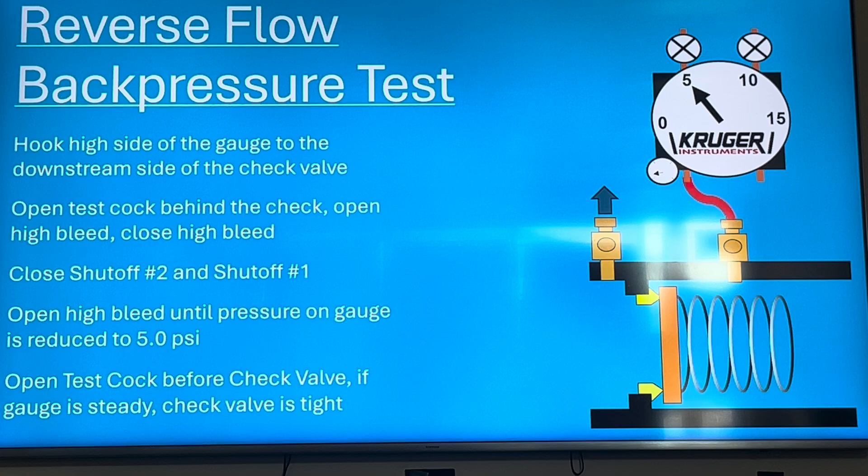I think in Iowa they do them. I remember some part of Iowa people were talking about it. And if you check the test reports on Iowa, they want back pressure tests on both check valves. It'll say did it pass differential pressure or did it test back pressure, but on both of them, not just check valve 2. So I think they were being legit about it. It is a 1-hose test, so it kind of has the same weaknesses where you have to shut both the shutoffs. So make sure you do that carefully if you have a big gate valve.

Again, these are the 5 types: static differential, directional flow, head flow, static back pressure, and reverse flow back pressure.